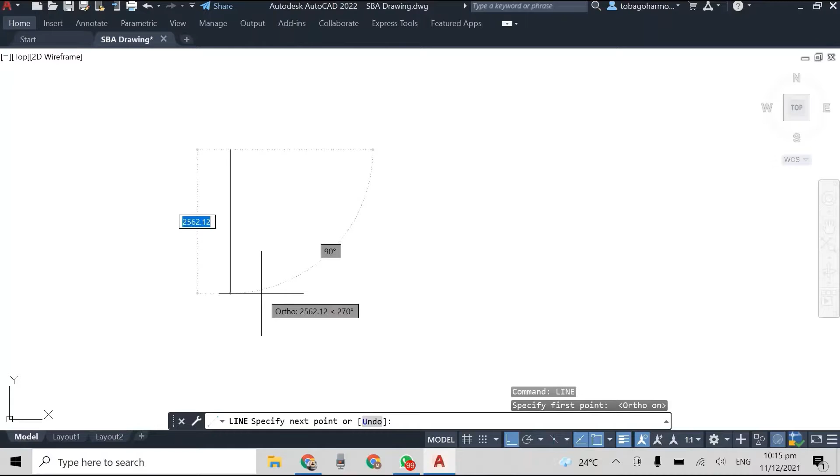Okay, so we're going to begin by drawing an isometric box, and the sides of the box will all be the same length, and their length will be the diameter of the circle. So in this case, I chose a circle with diameter of 1000 millimeters, and you'll see that my box has four sides of 1000 millimeters.

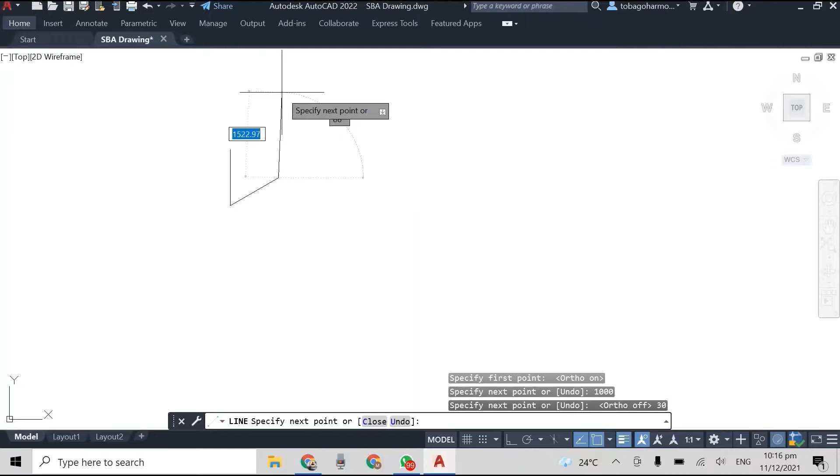Now it's an isometric box, so there will be vertical lines, but what should have been the horizontal lines will actually be drawn at 30-degree angles. Alright, so you can see me doing that here. And of course, you can do this for any circle, whatever the radius or whatever the diameter of your circle is.

Okay, so we have already drawn the box, and I did some drawings off camera. I'm just going to explain it to you. So what we did was we divided our isometric box into 4 quadrants. So we have a middle line running down, that's EG, that's a vertical line, and then we have FH running at a 30-degree angle, and we connected several points.

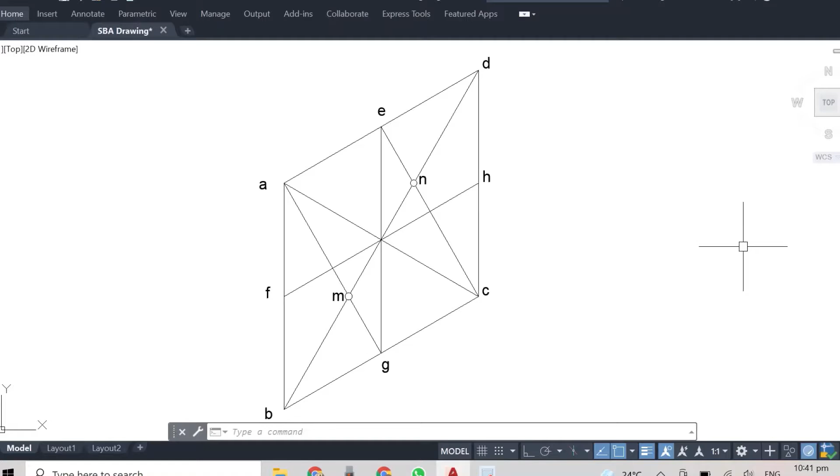At this point in the video, I would advise you to pause the video and note where all the lines are going. So we have line AG, we have line EC, we have line BD, which is a very long diagonal line, and then we have some major points. We have point M and point N. Right, so take note of all these points. Again, feel free to pause the video and take note of where.

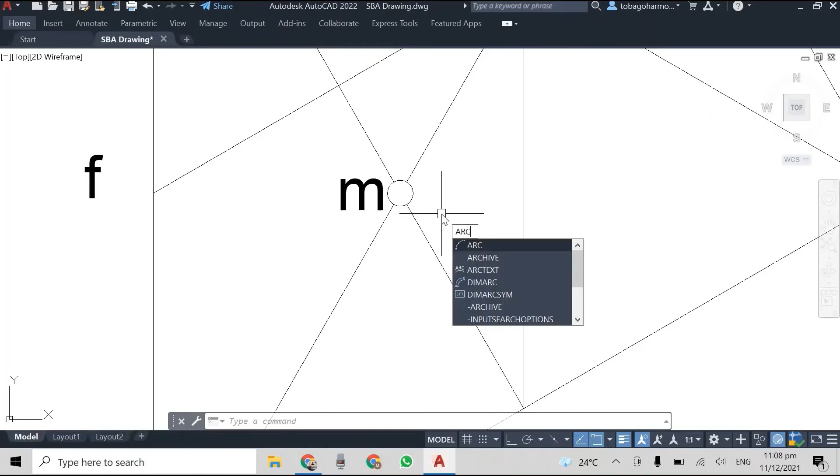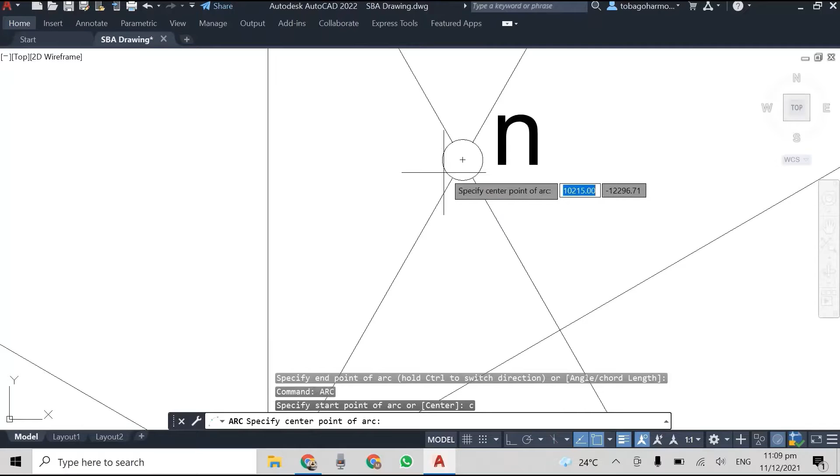So once you've drawn the box and you have all the lines, you're pretty much halfway there. So we're going to use point M as a center and draw an arc using MG, or MF, as the radius. And then we're going to use point N as another center. You can see me doing that here. And the radius will be NH, or the radius could also be NE, whichever one. So you draw these two arcs, and you are almost finished drawing your isometric circle.

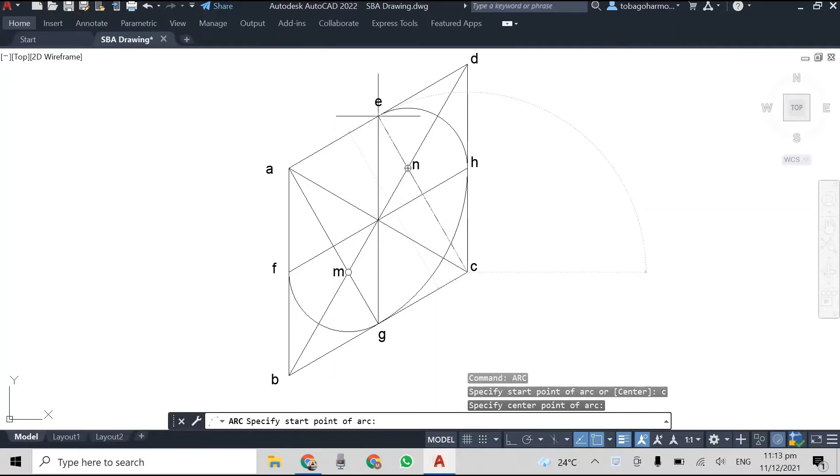As simple as this. What we're going to do now is draw the other two arcs. So we're going to use A as our center, radius AG, and draw an arc connecting G to H. And then, as you may have guessed, we're going to use C as our next center and draw arc CE. Yep, that's CE. And voila, there you have it. This is your isometric circle.

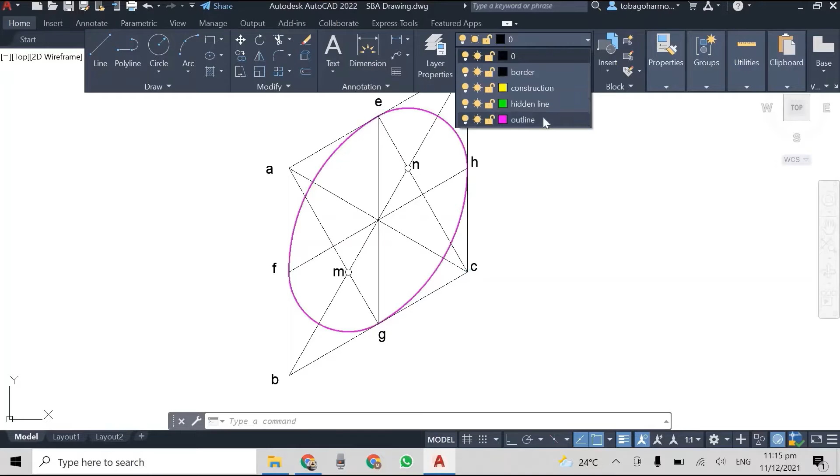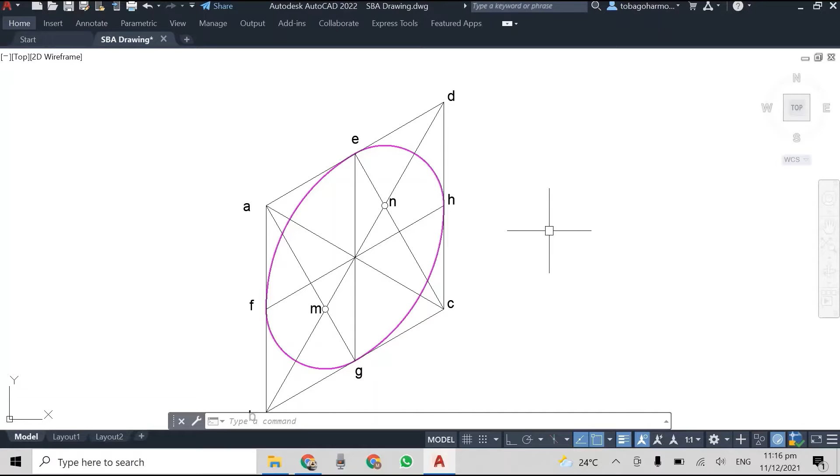So from here we're just going to highlight the 4 arcs, go to our layer, and change the layer, set it to the outline so that you can see it more clearly. And this is your isometric circle. It's one of the easier ways to construct an isometric circle, and you can do it to any radius or diameter. This circle was drawn on the right ISO plane. For those of us who are familiar with AutoCAD, you can also do it on the left ISO.

Okay, so we're going to begin with a circle. It's the same size as our previous isometric circle. It has a diameter of 1000 millimeters. So we're using the same size, right?

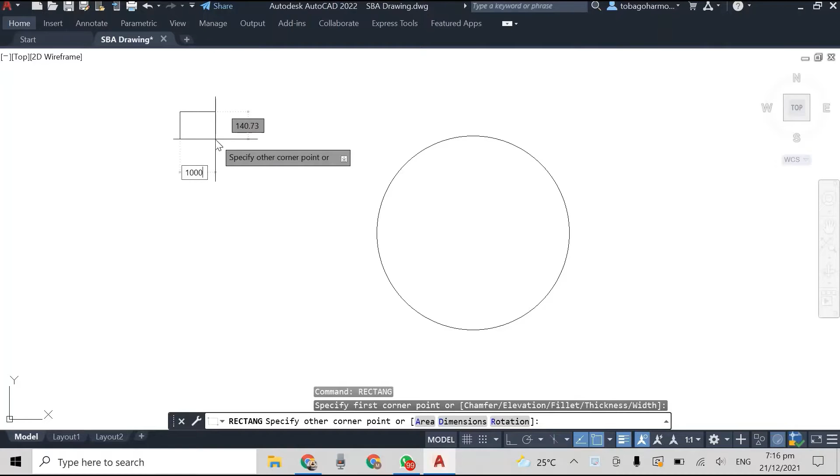So what we're going to do now is draw a square, and the sides of our square will be equal to the diameter of the circle. So the sides of our square will be 1000 millimeters, as you can see here. Right, so it touches the circle on 4 sides, and we're just going to draw a horizontal and a vertical diameter line or dividing line for the square.

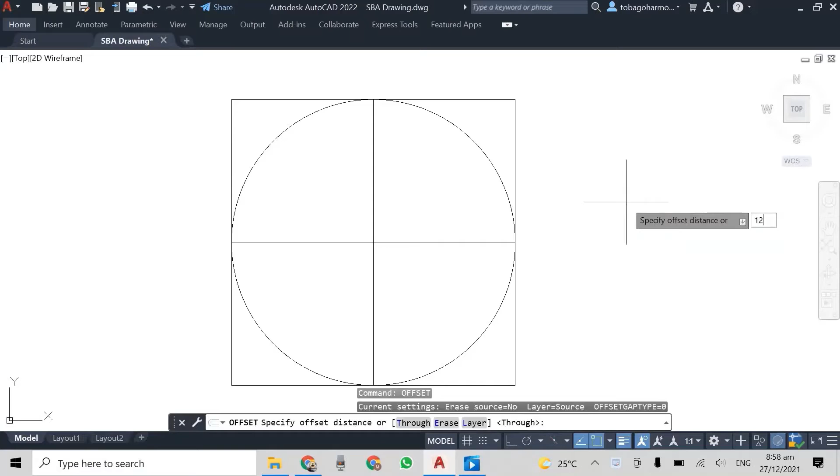And I'm just offsetting these lines with a distance of 125 millimeters in between them. So I'm putting some dividing lines and they're equally spaced. And what you will find is that the more dividing lines you have, the more accurate your isometric circle will be. So off camera, I just numbered the lines, from 0 to 4, with 0 being the center line and 4 being the outermost line.

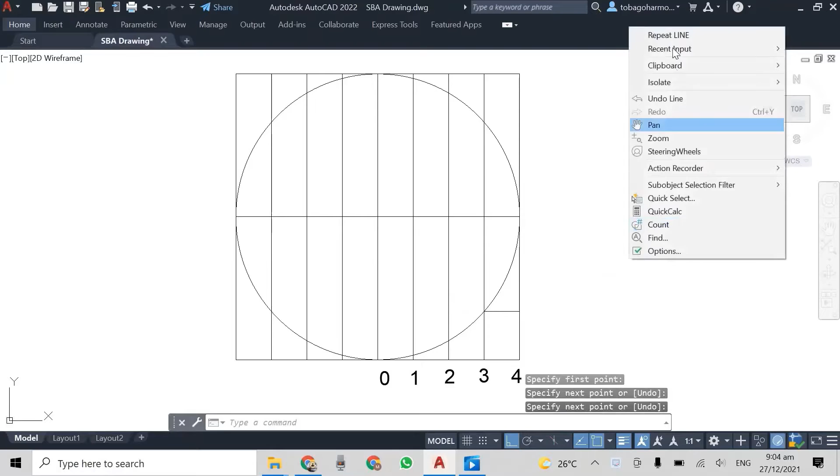Right, so I've actually sped up the video a bit here. What I'm doing is wherever the lines cut the circumference of the circle, I'm going to draw a horizontal line and bring it out to the edge like this. So the footage you are seeing now is actually at 2 times speed, right?

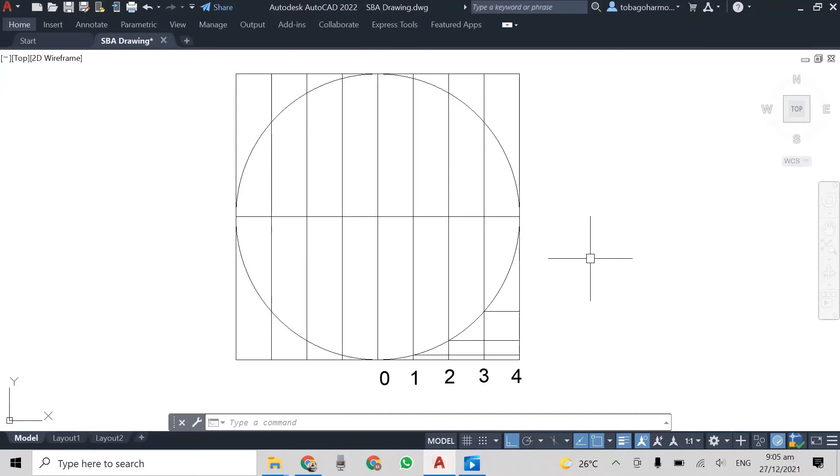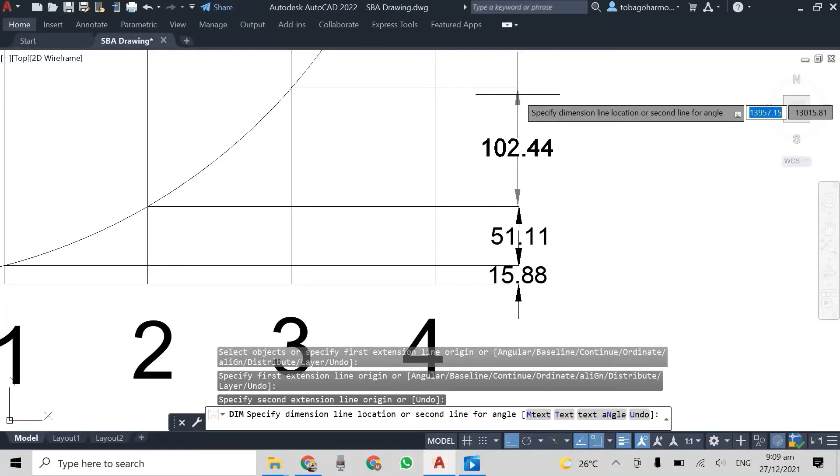Now once we have these lines, we're going to get the dimensions. We're going to see what the spacing is from the base of the square to the lines. So the first one is 15.88 millimeters, and once we get that first distance, I just take the others from each subsequent line. So the second one is 51.11. The third is 102.44 millimeters. And these measurements are very, very important.

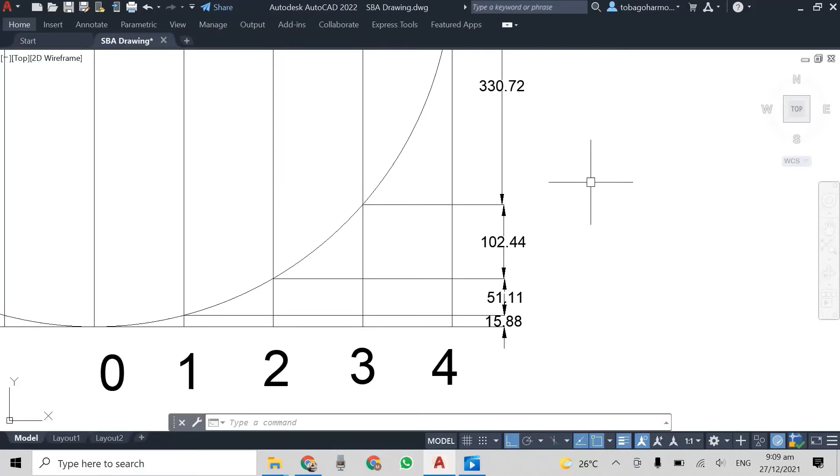Whatever size of circle you're using, you need these measurements. The last one is 330.72. All right. So these are the different distances, beginning from the base of the square and then the distance between each subsequent line. So we have those measurements.

Excellent. This is very good.

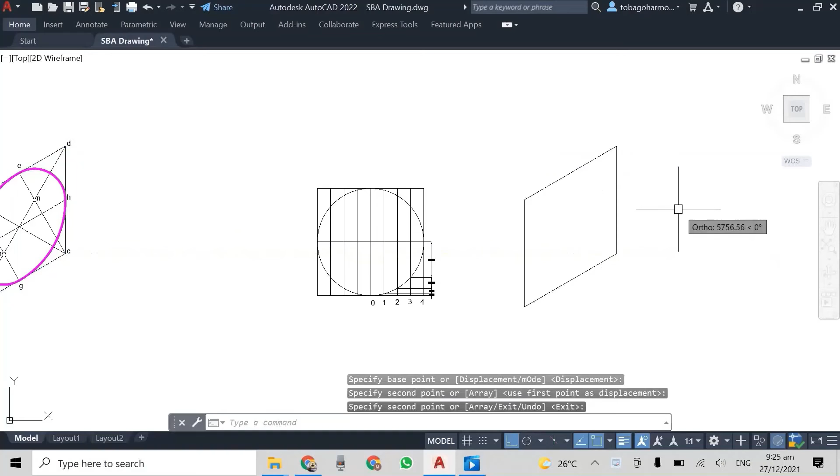Now we need to draw another isometric box. Going back to our previous video, you would have seen me draw an isometric box. It's not a square because the angles are not at 90 degrees, but it's a quadrilateral with all 4 sides the same length, and 2 of the lines are at 30-degree angles. I'm checking the dimension here, and the length of each side is 1000 millimeters, same as the diameter of our circle.

From here we basically transfer measurements from the original drawing to the isometric box. I'm going to draw a vertical line, then a 30-degree line like this. It's not horizontal, but at 30 degrees. So we have our 4 quadrants.

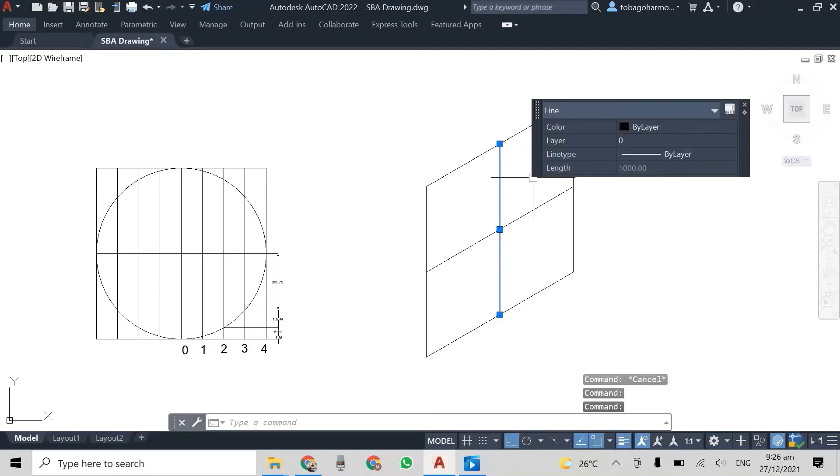You can see that I took the vertical and horizontal diameters and transferred them, just that it's not horizontal in the isometric box. We're just double checking the measurements. They are 1000, as you can see.

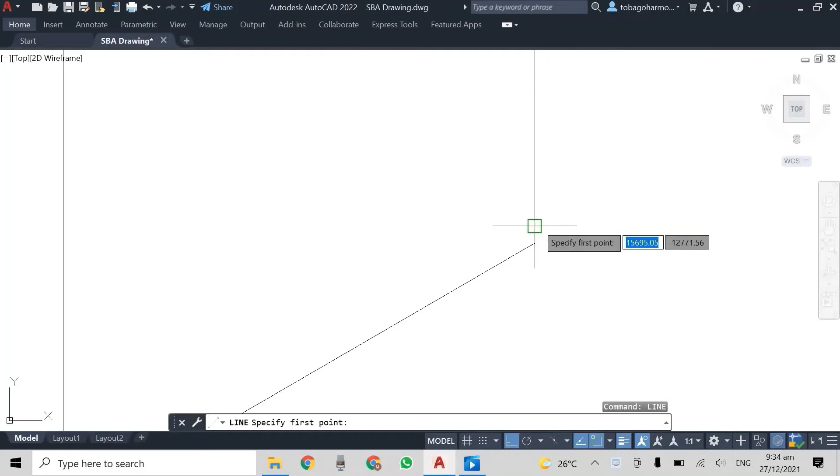Now, with the measurements we had previously, I'm going to draw some lines along one edge of my isometric box, and these lines will allow me to get the same spacing. So you can see me entering the dimensions: 102.44, and before that we had 51.11, etc.

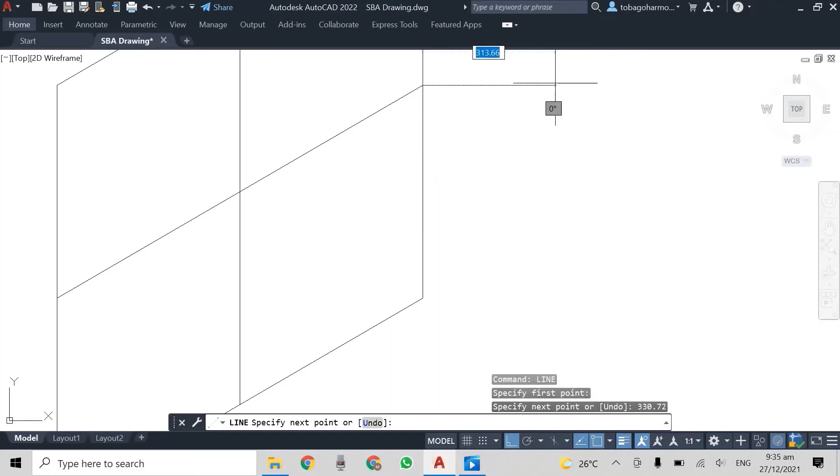You can see that my final line does end at the midpoint, so everything is accurate. I'm just going to copy my baseline now and place it at the spacing, or at the end points, of the lines that I just drew.

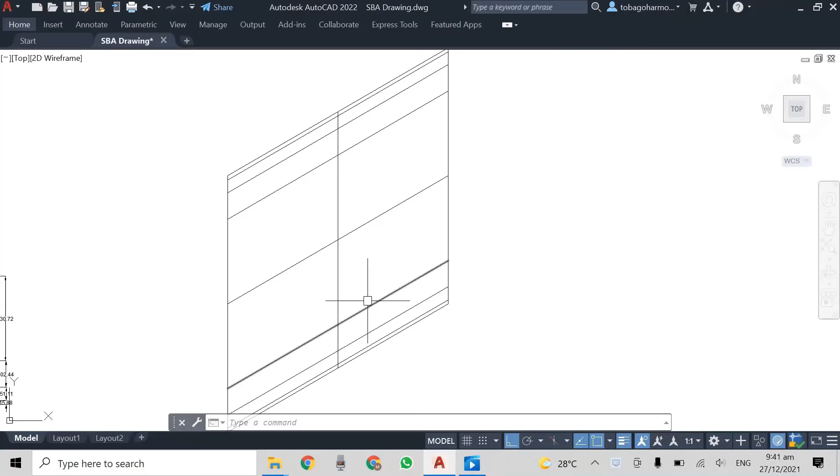Now you have to do the same thing for the top of your isometric box. I did it off camera just to save time, but you can see that they are basically a mirror image of each other.

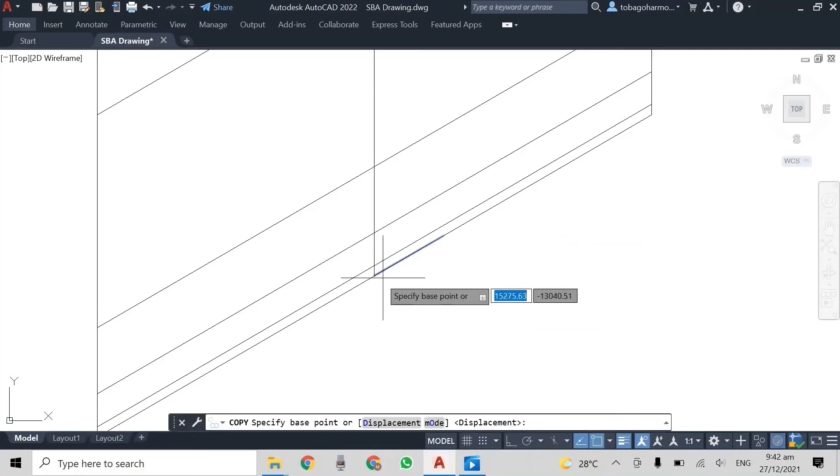Now you can see the spacing between my lines here is 125 millimeters, as I mentioned earlier. So what I'm going to do is get some 125 millimeter spacings on my drawing. That's what I'm doing now.

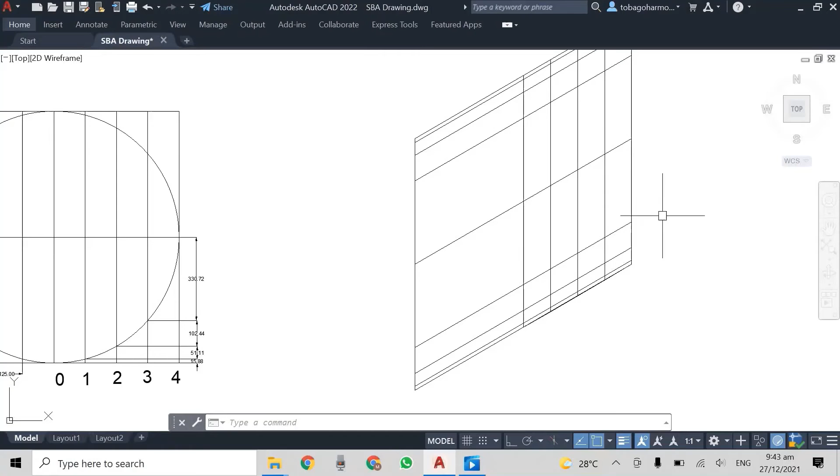My vertical line, I'm just going to copy it to each 125 millimeter spacing. We have to do this on both sides. We need the vertical lines on both sides of the isometric box. Again, I did it off camera to save time.

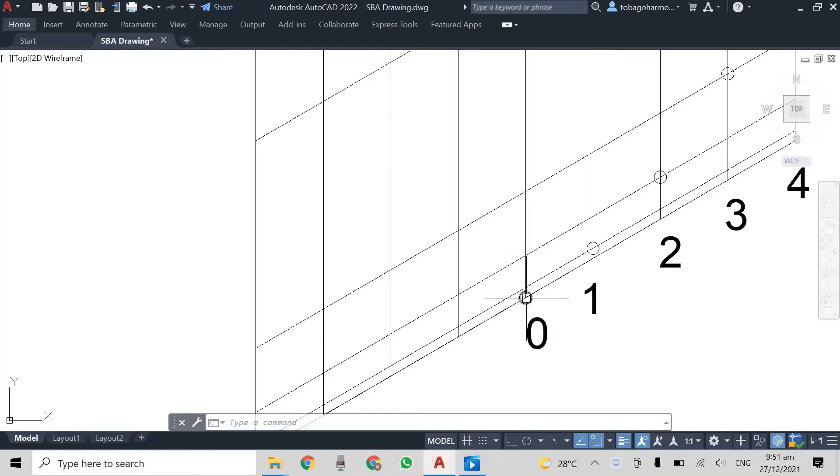Now you'll see here I have some circles highlighted. These are the points, the dots, that we are going to connect. I just did it on one half of the circle just to highlight them. So from the bottom or base of the circle where it says 0, 0 will be in the middle, then 1 will be 1 line higher, 2 will be 2 lines higher, 3 lines higher, 4 would be on the edge, and then you come back into 0.

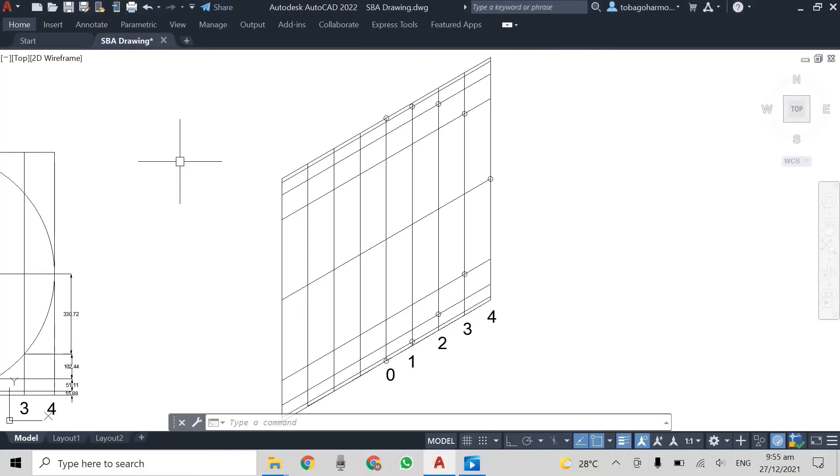It's pretty straightforward, and the next step will be to actually draw the line. You're going to draw it all the way around because we are doing a circle. If you are doing an arc, you could draw a part of it. We're going to use the spline command, spline fit, and you just come and click by all the intersecting points, as you can see me doing here.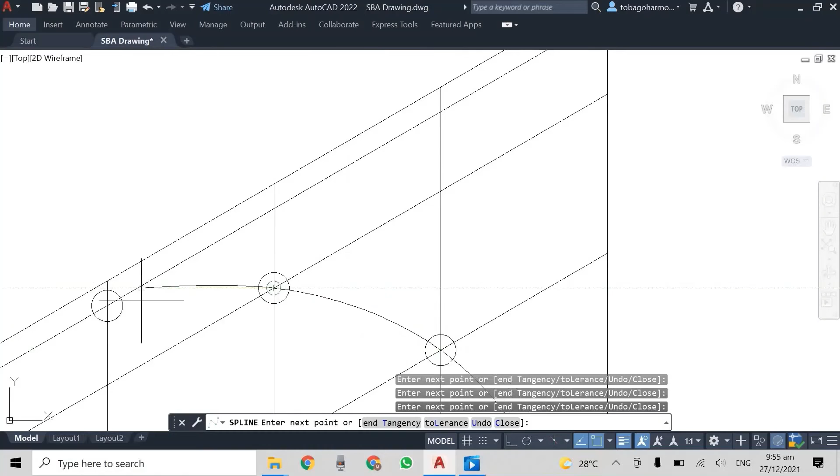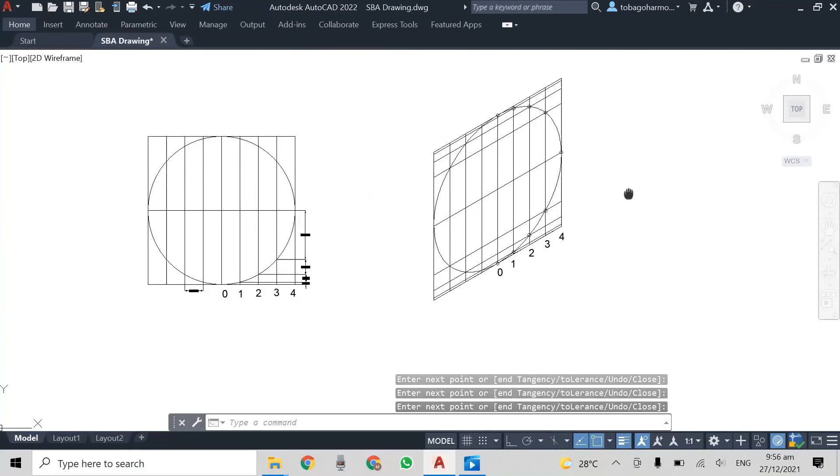You click there, you click, you come around, and then you come back down. So you just follow the order. Each time I get to an intersecting point, I click, and when I get back to my starting point, I press enter. And there you can already see the circle, or the isometric circle, in all its glory.

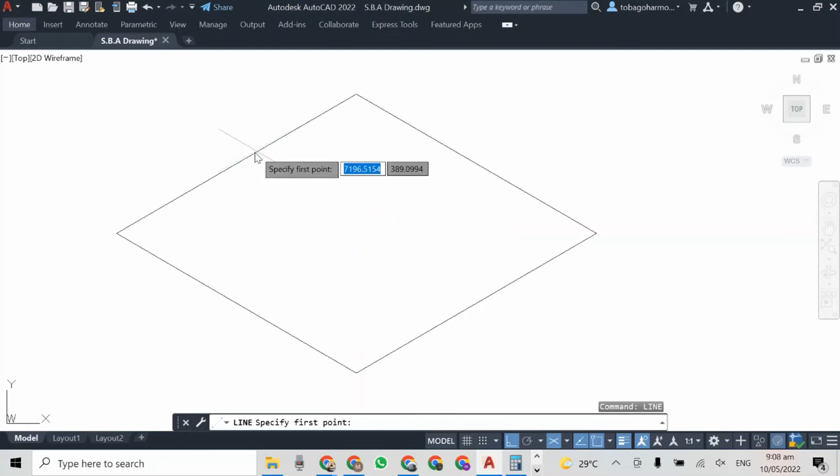So as usual, we begin with our isometric box, as you can see here, and the difference with this isometric curve or circle and the previous ones I did is that this one is laying as if it were on a table, whereas the others were standing on edge. I'm using the ISO draft command, and I'm in the isoplane top configuration.

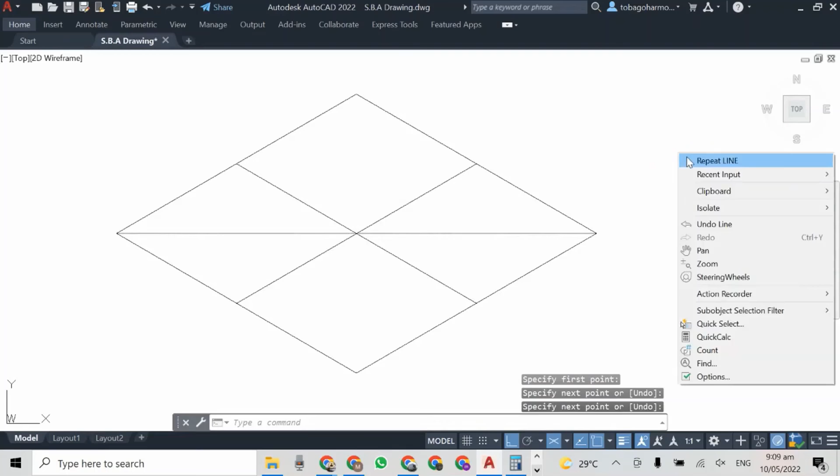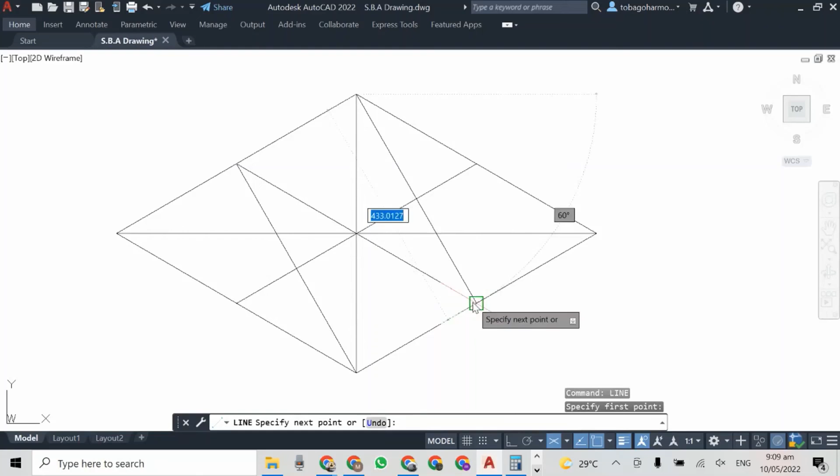The steps are the same. This is the approximate method that we would have done before. So you identify, you have your midpoints, your center lines, your diagonal lines, and now I'm putting in these 2 additional lines that will give us the center points for the arcs we are going to draw.

I'm using the arc command here, and this is our first center point. I didn't go ahead to label the points and all that because I did it in a previous video before, and it is linked below, or it will be linked below rather. But you can follow along either way.

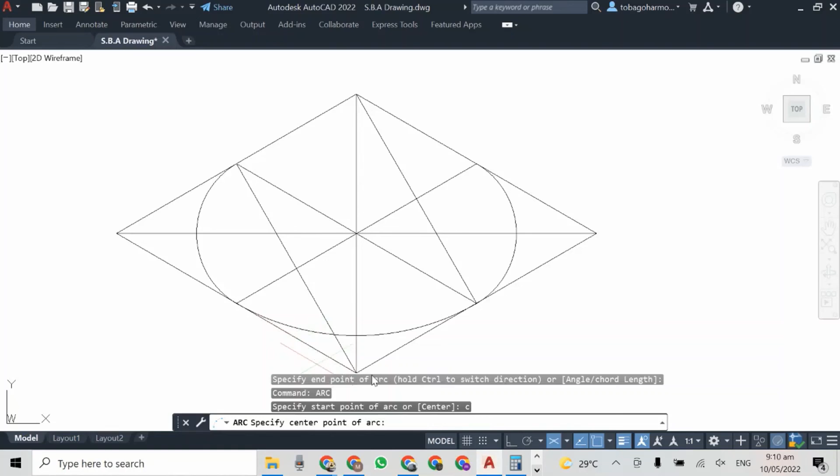We are almost finished, and this is our last arc, and you can already see we have our circle here. Now I don't want the entire circle highlighted, it's just the outer section, so I'm going to change the layer, as you can see here. And now I'm going to add the depth.

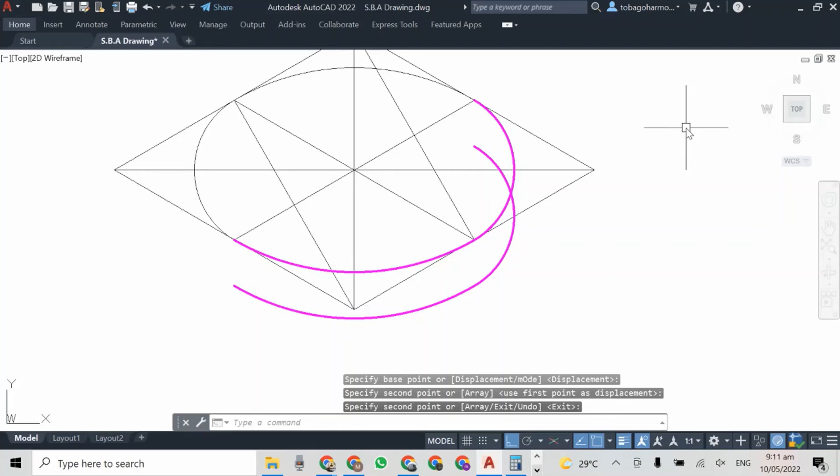So I selected these 2 arcs on the right side, I think you could say, and I'm adding the depth to the object, and I'm just going to go ahead and trim off the excess just for presentation's sake.

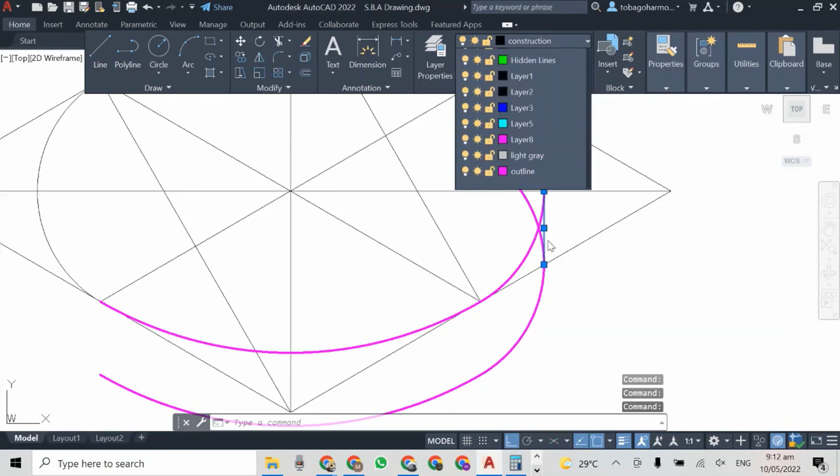Ideally you should leave your construction lines, all construction lines. In this instance, I'm just going to delete it. Let me just fix that. I'm just going to delete it just for the sake of presentation. All right, but that's it.

This is our isometric curve. This is the front of the object that you saw at the beginning of the video.